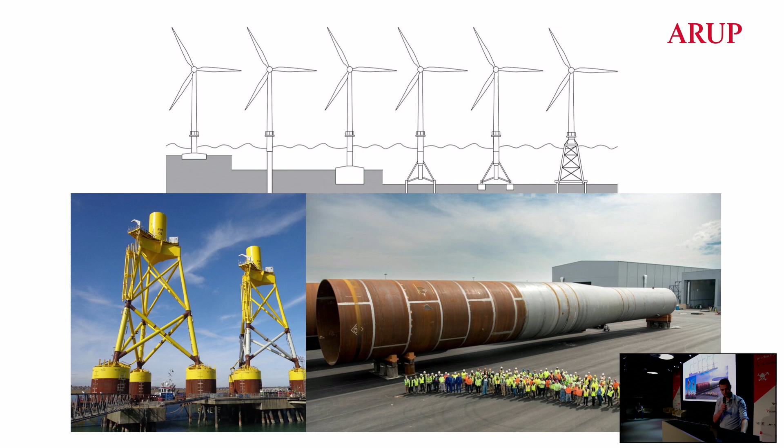In that kind of project, as in most projects, communication is mostly about the handshake between the designer and the modelers. The exchange of information between these two is most often a linear workflow. So if there are any changes in the design - and of course there are, because this is design, there are changes in the project - then the modeler needs to very often delete all or most of their work and rebuild it again.

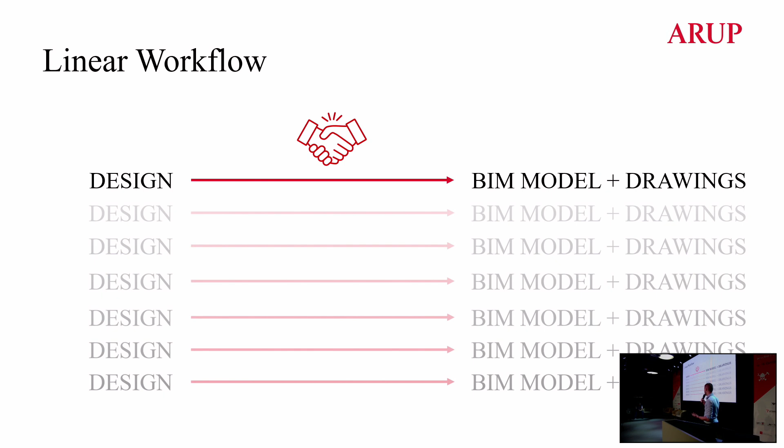And again. So in offshore wind foundations projects, we thought, okay, maybe it could be good to just automate that handshake between these two. We thought maybe it could be good to change this linear workflow into a more circular one, and we worked on it. Firstly, we gather all the information from the structural designer and geotechnics designer into one single source of truth, which is one JSON file.

Inside this JSON file we stored information about the geometry, materials, but also more general information like drawing titles. Having that information inside the JSON file, we're able to automatically build 3D models, drawings, and later create PDF files which were ready to be sent to the client, with constant track of changes between revisions.

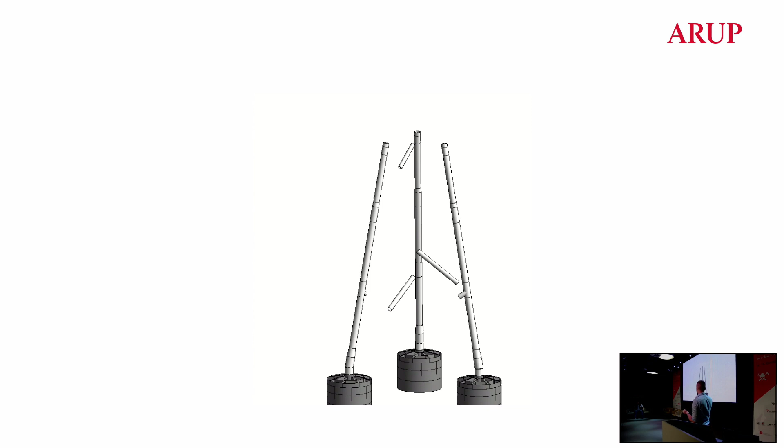So having that kind of workflow, we were able to get information from the JSON file and create elements in 3D in Revit one by one, using Python coding and Revit API. To be honest, creation of the elements was the easiest step. The hardest part in the geometry processing was creating connections between these elements, because we needed to recognize which elements intersect with each other and create nice, realistic joints between them.

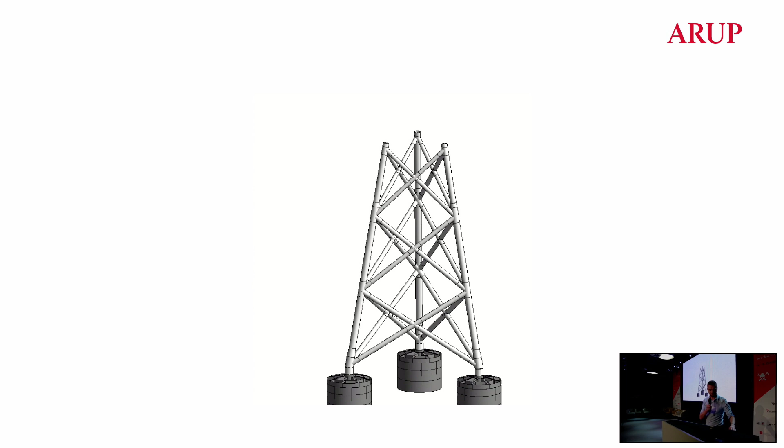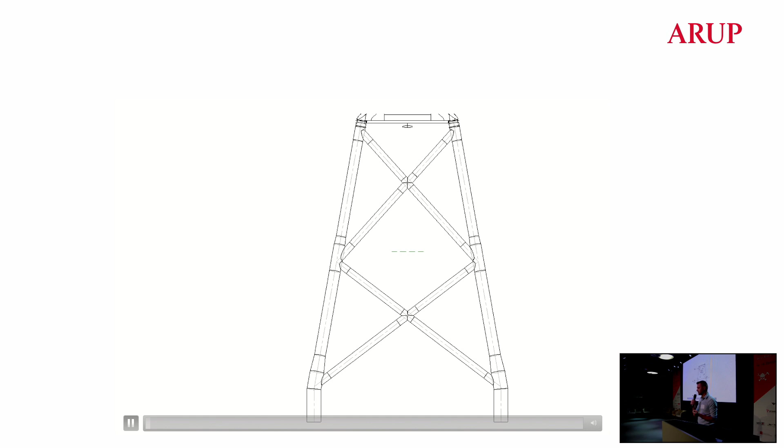Okay, but at the end the deliverable for the client are drawings. So having the 3D model, information about the geometry, and information about drawings inside the JSON file, we're able to get this information and create sheets, create views, distribute these views between sheets, and annotate the drawings. So we could add dimensions, add levels, and add tags.

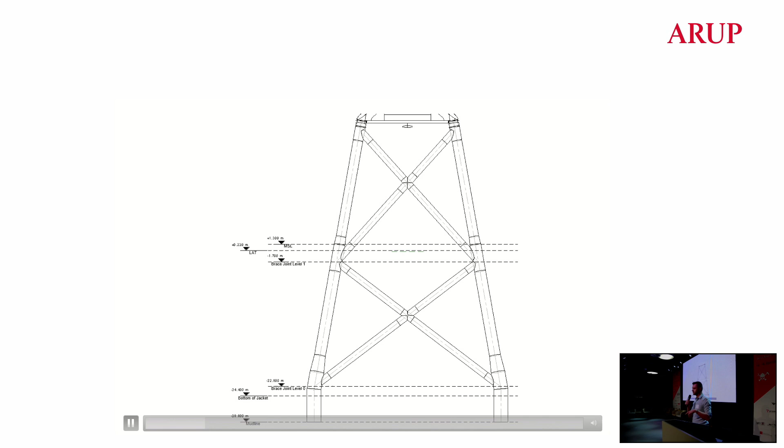I think the most interesting part is the tags, because we created a kind of intelligent algorithm that creates the tag near the middle of the element, and then checks the intersections between this tag and all other objects in the drawing. If it finds any intersection, it rotates a little bit around this center point and checks again, and again, until it finds a location without any intersections.

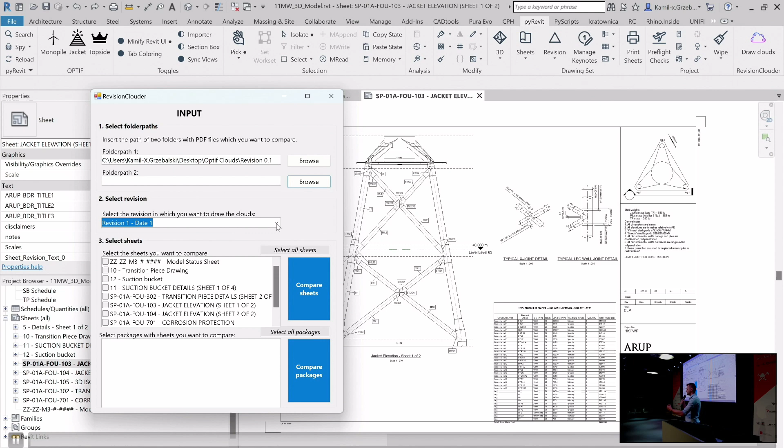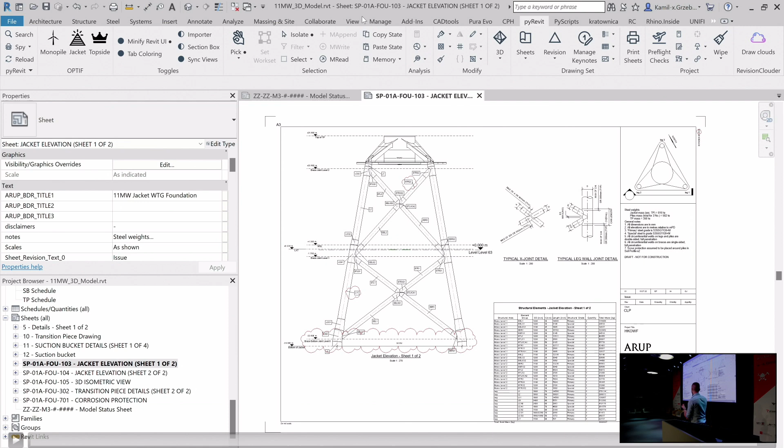Okay, and the last step was checking the changes between revisions. It was a quite easy script just to compare PDF files between two revisions. We checked the previous revision and the current revision, and compared them in terms of pixels, pixel by pixel, to see if there are any changes between these drawings. If there are, we recognize it as a design change, and having that information, we're able to come back through Revit and create a revision cloud around this change.

So this is kind of the end of the workflow. Now we can give the drawing with revision clouds and all the annotations to the designer, and they can decide whether this is the good product to give to the client or they need any changes. If they need any changes, there's nothing more simple than giving us another data set and we can do the automatic process again. And this is where the circle closes.

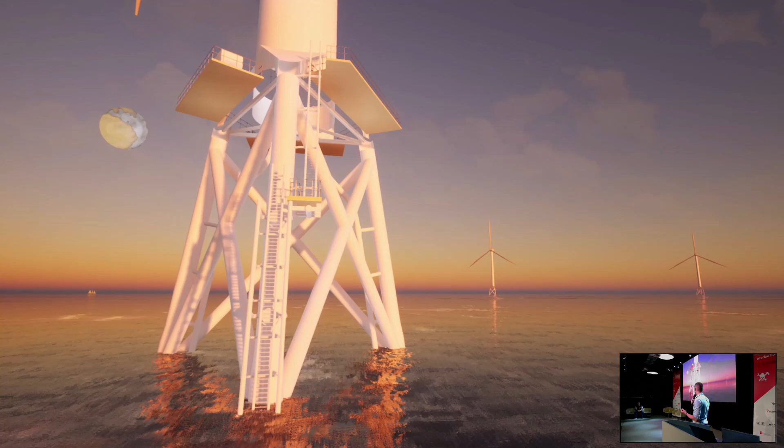That kind of efficient workflow helped us change our work and omit working late. That's the first thing. It also helped us work on the most interesting things, coding, instead of creating thousands of tags manually. It helped make our work more satisfying, our drawings more accurate, and we also saved budget, which is also very important.

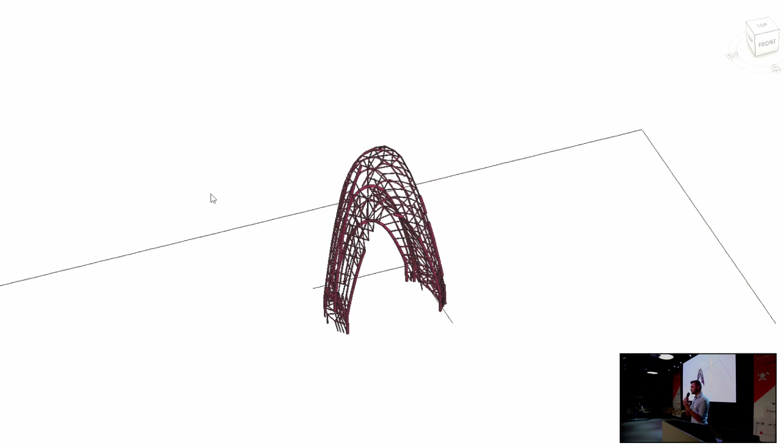And the last addition to this project is another project where we used some part of this workflow, geometry generation, in the same way. So it's not like we develop a workflow and it only works for one project. We can use it and reuse it on other projects really quickly.

So the workflow that Kamil was talking about is absolutely beautiful. Smooth data flow across different disciplines is something we're aiming towards on every single project we work on. And sometimes we're succeeding, and sometimes, well, we're far off, to be honest.

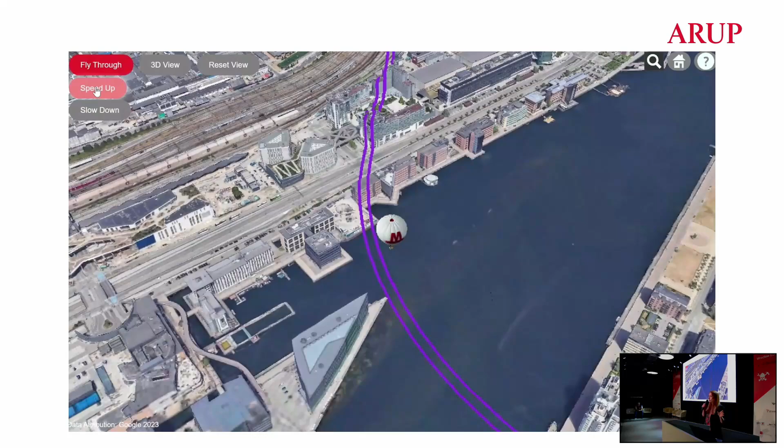On big multidisciplinary projects, there's the roads team, the architectural team, the bridges team, and the structural design team. All of them want to work in different software, all of them have their own workflows, and they really don't feel eager to change them for the sake of automation. This is an example of a project where we set ambitious goals to collaborate with them and convince them towards automated solutions.

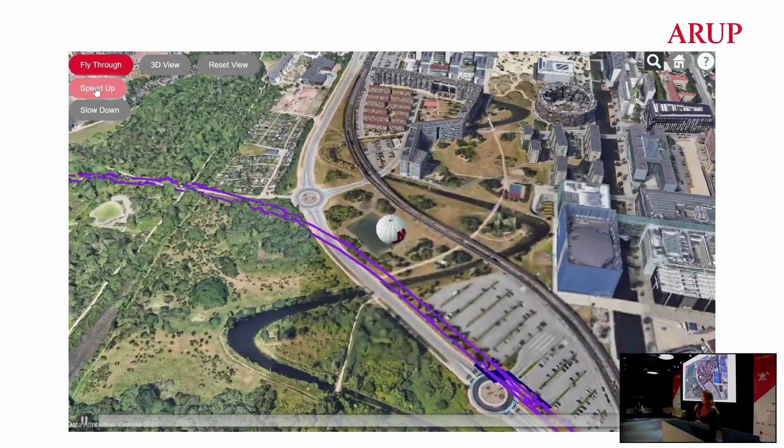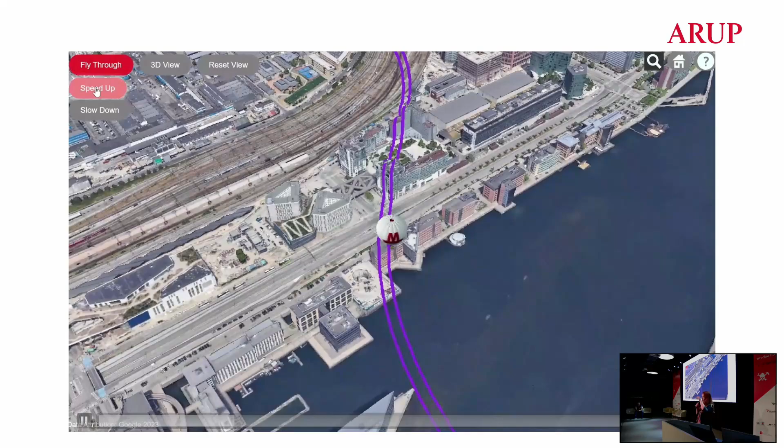This is the Copenhagen Metro project, where we're designing the M5 new line, and also working on the new Ring 3 road tunnel that will go around Copenhagen. We're basically designing tunnels, bridges, roads, stations, shafts, ramps, viaducts, everything—a massive project. So we have to be ambitious. I'll show you a couple of examples of how we've managed to get ambitious on this project, and that I'm quite proud of.

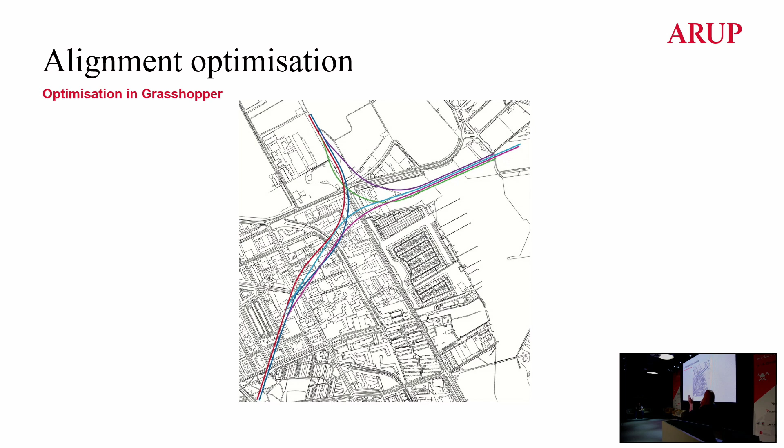The first thing is alignment optimization. Instead of manually drawing the tunnel line and deciding how the tunnels in the new metro line will go, we ask the optimization algorithm to set out the tunnels so we can minimize the total length of the tunnels while respecting all the requirements—for example, not exceeding the maximum slope or minimum bending radius, or the minimum distance between tunnels. We're automating an awful lot.

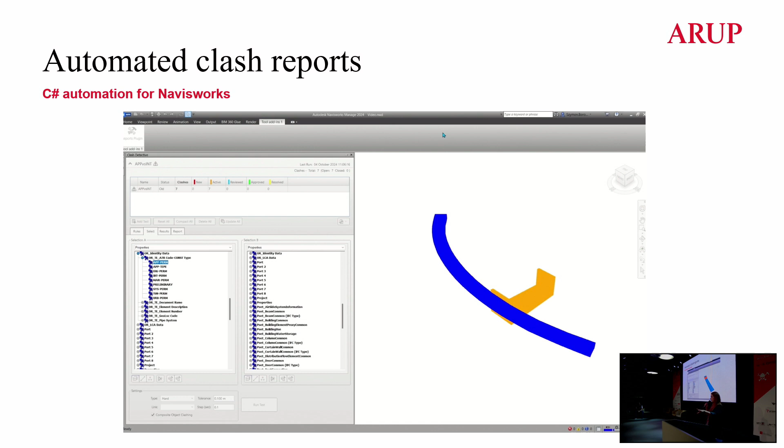For example, doing some Navisworks C# automation for automated clash reports. We have these scheduled workflows that every Friday night go through all the models and automatically export all the data about clashes between the models. And the project team can then have their well-deserved Friday beers instead of just clicking the export clash report button.

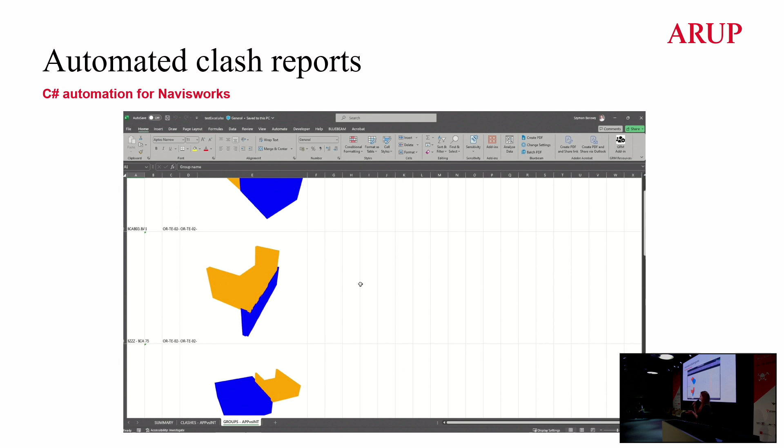We're automating reinforcement, and that required us sitting down with experienced reinforcement modelers and asking them, okay, how do you do that, and then turning that into code, into scripts. Of course there are existing tools that do that, but from our experience they're not satisfactory because they never work the way our engineers want them to. This is why we're often building custom things inside Arup so that our very experienced Arup engineers are happy with the outcomes.

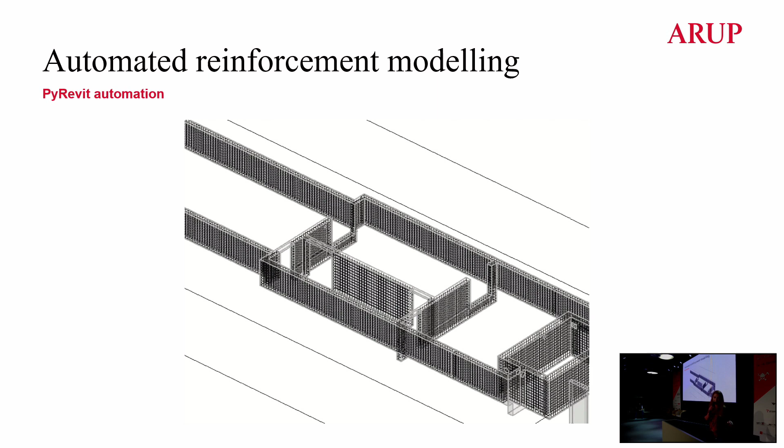We're automating the drawing production, so something similar to what Kamil was showing—a massive time saver, and hopefully an increaser of the overall team satisfaction.

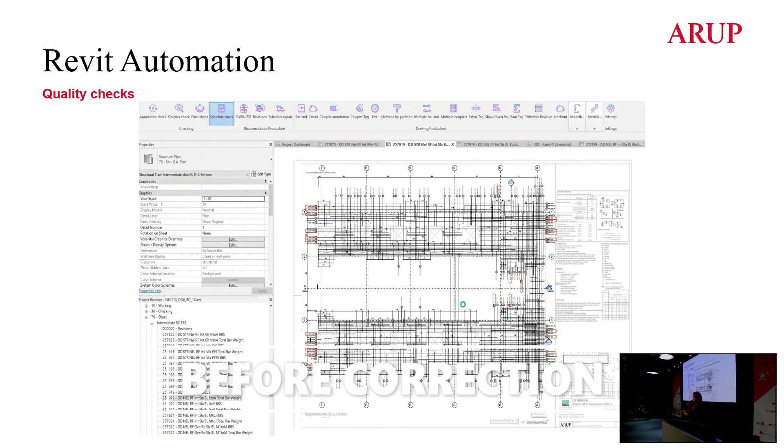And then this is a fun one. We're doing automated quality checks, and we're doing that in a way that there's this very experienced old guy at Arup who used to draw reinforcement manually. So we ask him, can you check our automated drawings? Can you spot any errors? And he comes back saying, this bar is too long, I think it shouldn't be that long. We take his remark and code it into automated quality checks. After conversations with him, we're building a database of possible errors he spotted, so the overall quality of documentation is massively increased.

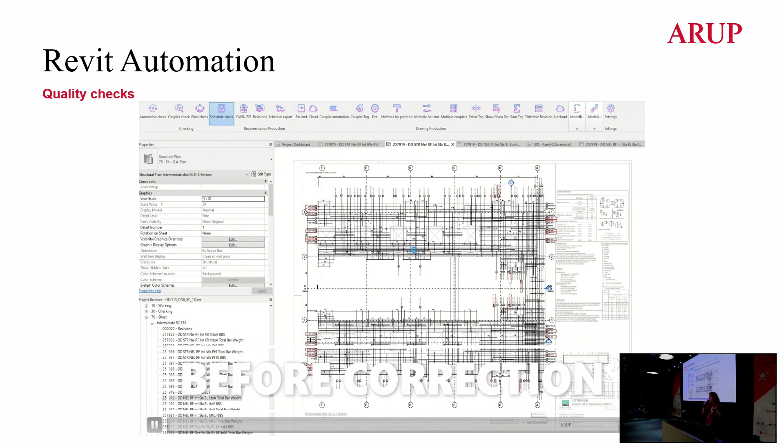And of course, this very experienced old guy spotted one error on one drawing, but our automated checks go through all the models, so we suddenly discover this error in multiple places, at the beginning especially. And of course that wouldn't be possible with just manual checking.

We're struggling a lot with interoperability. Every team wants to work in their own software, so we had to get familiar with Bentley and Autodesk APIs. We're coding a lot of C# and Python scripts so that we can get these models to talk to each other and form a uniform data set. For example, this is the OpenRoads automation, where we're introducing the same parameters to all these models, no matter what software a team is using.

We sit down with the team and have many discussions, asking them, how would you input this structural material parameter? And then they explain the workflow, and suddenly we discover that could be coded. So we code the automated filling in of the parameters. And this is super important. You might think it's boring talking about parameters in OpenRoads, but it's far from boring.

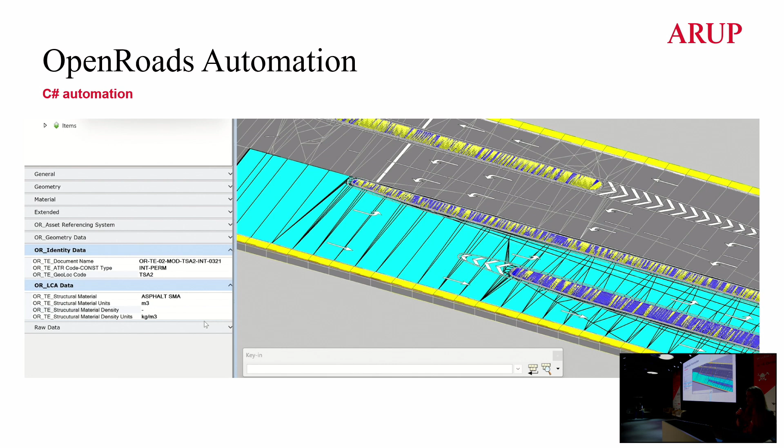Because we can then schedule automated data exports from all of these software. So every Friday night, we gather all data from across the project, and then we can use this data to get real data insights.

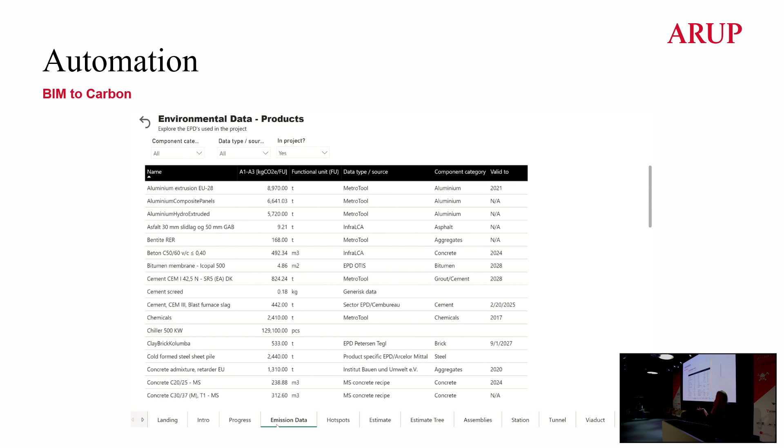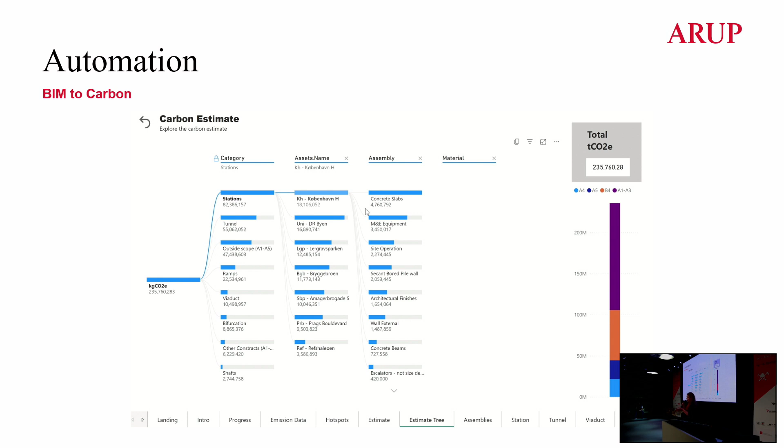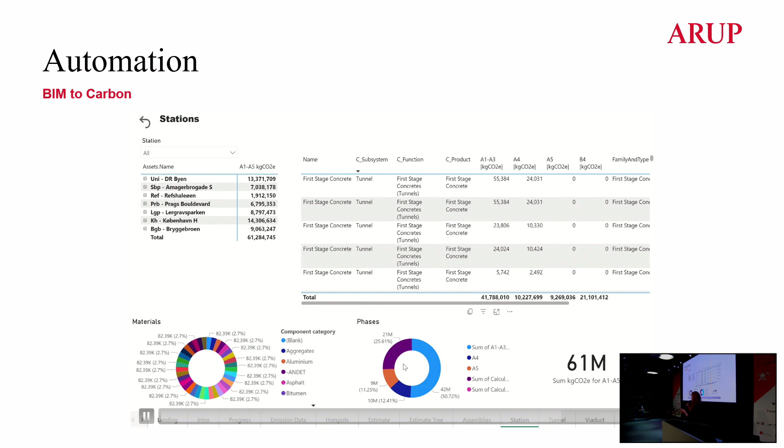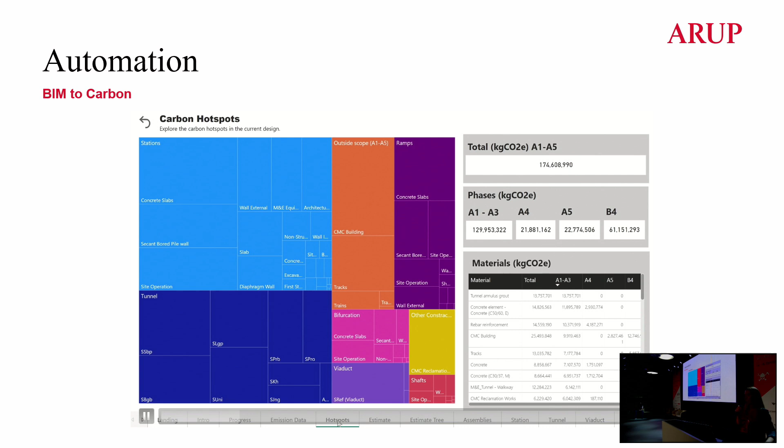So all these dashboards, I really think if people used them smartly, they would enable us to take decisions in a more data-driven way. And I would love to show you the BIM to cost dashboard, but I can't because it's super confidential. So you'll just have to believe me, it's absolutely brilliant.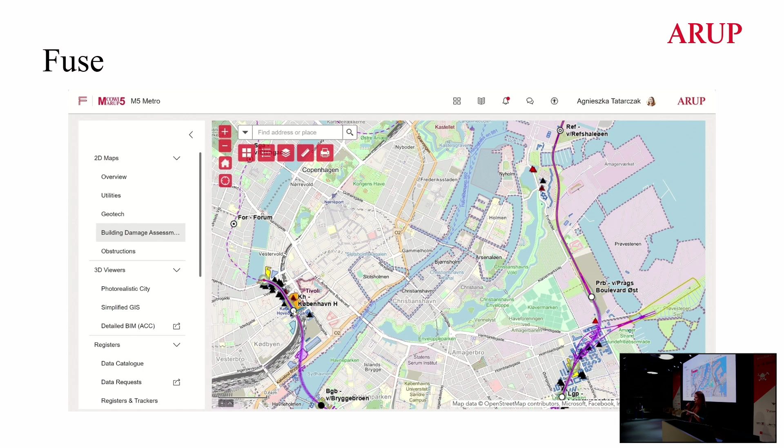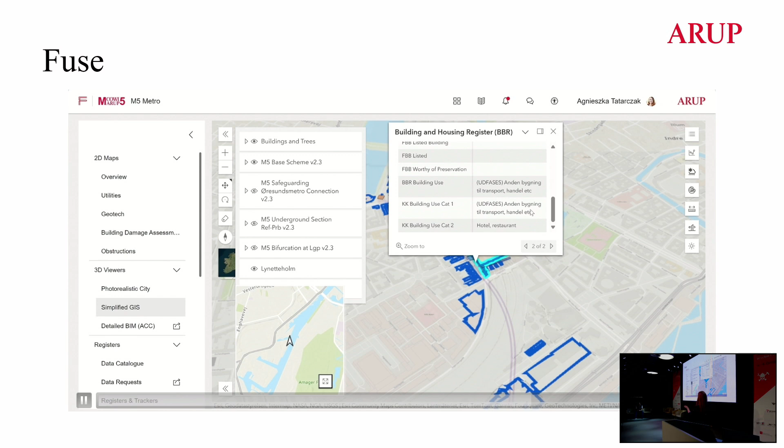So how do we make sure stakeholders on the project actually look at this data? How do we make sure somebody opens these dashboards and it's not just us, the digital guys, having fun with Power BI? There's a platform we've built for the project called Fuse, which has all the relevant information for the project in one place. So all the stakeholders, from the client side, the architect side, the designers, the project management, can very quickly access all the information they're interested in, with links to SharePoint, geotechnical information, utilities data, GIS, GeoBIM, whatever they need.

And of course, this platform is built custom for the project. So if someone has specific project needs and thinks this information would be super useful to have at hand on this platform, we just build in another new module to the platform.

And then the platform has this project GPT built in. It's basically ChatGPT, but operating only on project-relevant documents. So it's super quick to find out what's the relevant information I'm looking for right now, for example, what is the tunnel radius. And what's happening in the background, in the Python code you don't see here, is there's an additional prompt asking ChatGPT, please do not hallucinate.

Please don't tell rubbish. If you don't find this information in this document, just don't hallucinate and come up with things randomly.